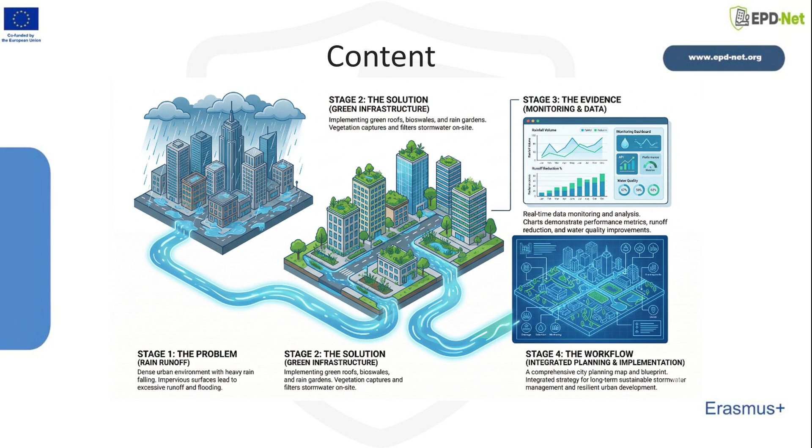This sequence matters because performance percentages have little value if they are disconnected from planning scale, policy context, and maintenance reality. Topic 1903 is therefore not just about what works in theory, but about how to move from evidence to practical, context-sensitive intervention. It also helps learners understand why evidence has to be read in relation to scale, function, and implementation pathway rather than in isolation.

The learning objectives frame the whole deck. First, you should be able to explain the basic concepts of ecological approaches in landscape planning. Second, you should be able to interpret climate adaptation policies and planning frameworks, including the broader European sustainability context. Third, you should be able to analyze ecological risks using digital tools such as GIS, BIM, and parametric design methods. Fourth, you should be able to outline nature-based solutions and multifunctional green infrastructure models. Fifth, you should be able to argue for interdisciplinary and inclusive ecological planning principles.

The associated skills are equally important: integrating ecological networks into planning scenarios, developing adaptive strategies for climate-related risks, applying sustainable water management thinking, and strengthening the resilience of urban form. Topic 1903 therefore expects you to connect evidence, spatial reasoning, and professional judgment in a way that supports real planning and design practice. In assessment terms, you are expected to move from explanation to evaluation and from evaluation to justified planning choice.

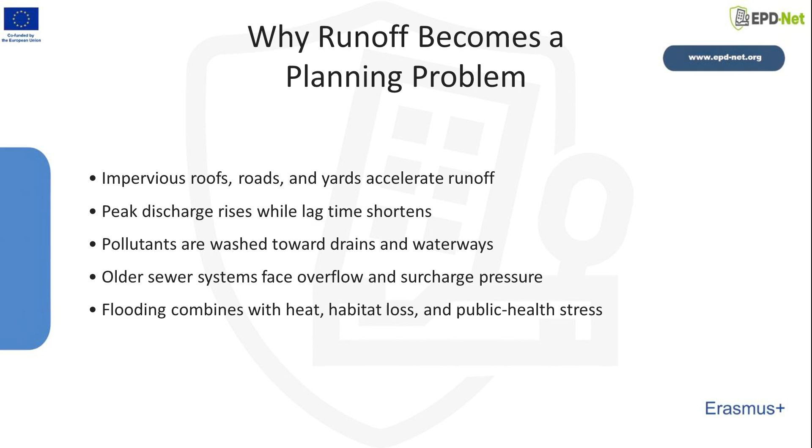The first technical lesson is that urbanization changes how water moves. In undeveloped landscapes, rainfall is divided among infiltration, evapotranspiration, shallow storage, and slow overland flow. When surfaces are sealed with roofs, asphalt, concrete, and compacted ground, that balance shifts quickly. Water reaches drains faster, peak discharge increases, and the time between rainfall and flooding becomes shorter. Pollutants that settle on streets and hard surfaces are also washed downstream more efficiently. In many cities, this creates pressure on aging drainage systems, especially where combined sewers or undersized networks were not designed for current development intensity.

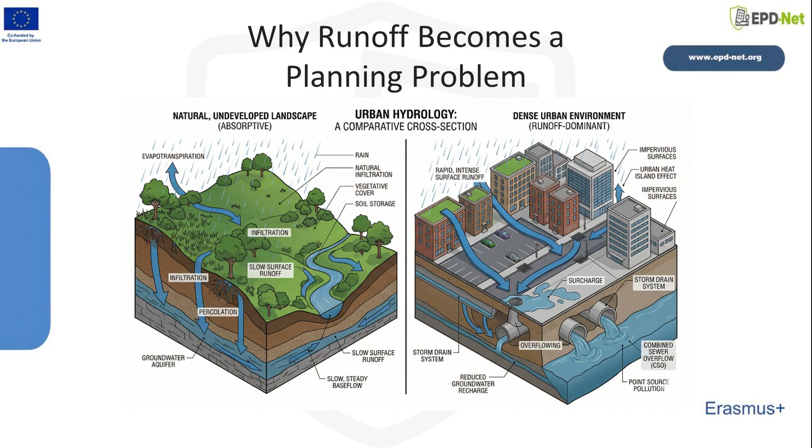The planning implication is important. Runoff should not be treated only as a pipe capacity issue. It is also a land use, design, and ecological function issue. Decisions about surface cover, storage opportunities, street form, open space, and building retrofits all influence resilience.

Stormwater planning today is closely tied to climate adaptation and resilience policy. Instead of treating drainage as a hidden technical service, many frameworks now connect water management to biodiversity, public space, resource efficiency, and disaster risk reduction. Within the European policy context, that shift is visible in the broader sustainability agenda and in support for nature-based solutions as practical tools for adaptation.

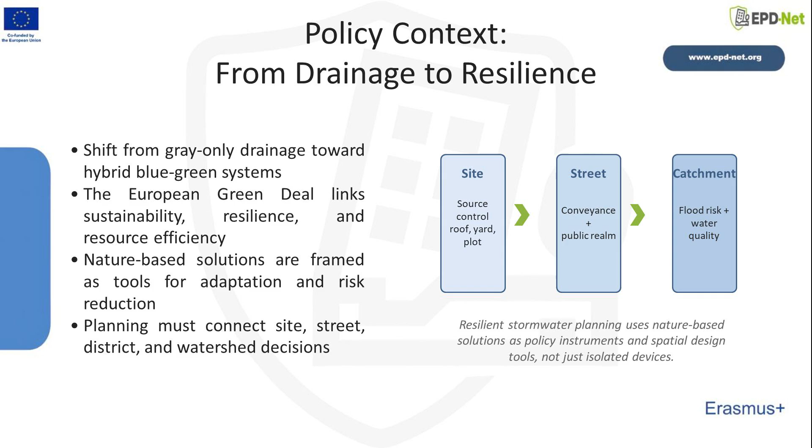For Topic 1903, the policy lesson is that green infrastructure should not be introduced as decoration or branding. It has to be connected to measurable planning goals. That means linking site-scale measures to street, district, and watershed priorities, and showing how they contribute to both environmental quality and risk management. The policy perspective also prevents a common mistake: assuming that one intervention automatically solves every problem. In reality, resilience comes from coordinated systems, not isolated devices.

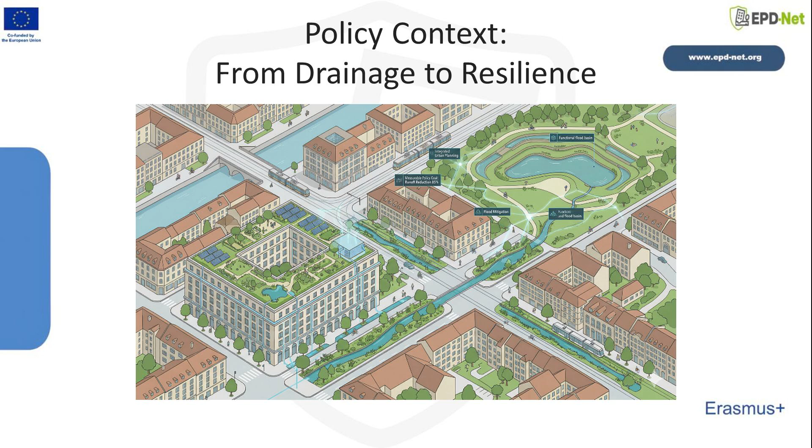That broader framing is useful because it links stormwater decisions to resilience funding, environmental justice, and long-term urban quality. At this point, we need a clear vocabulary. Green infrastructure is not a single technology. It is a family of measures with overlapping but distinct roles.

Green roofs are useful where roof area is abundant and ground space is limited. Bioswales guide and filter runoff along linear routes, especially in streetscapes and parking edges. Rain gardens provide localized detention, filtration, and infiltration in planted basins. Permeable paving reduces sealing and can support distributed storage and infiltration where traffic and soil conditions allow.

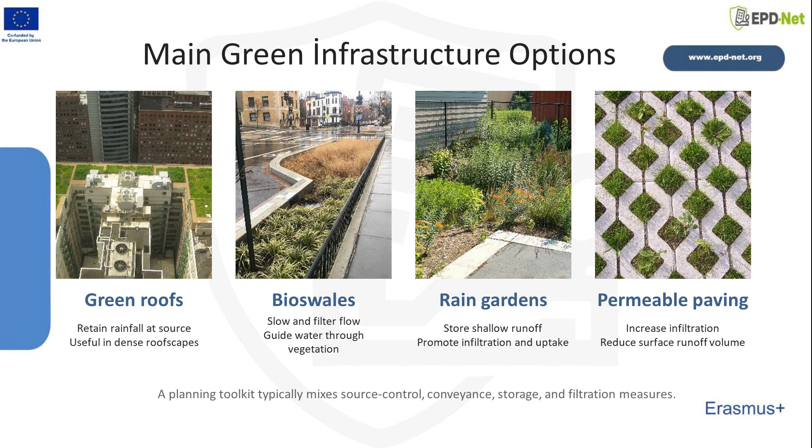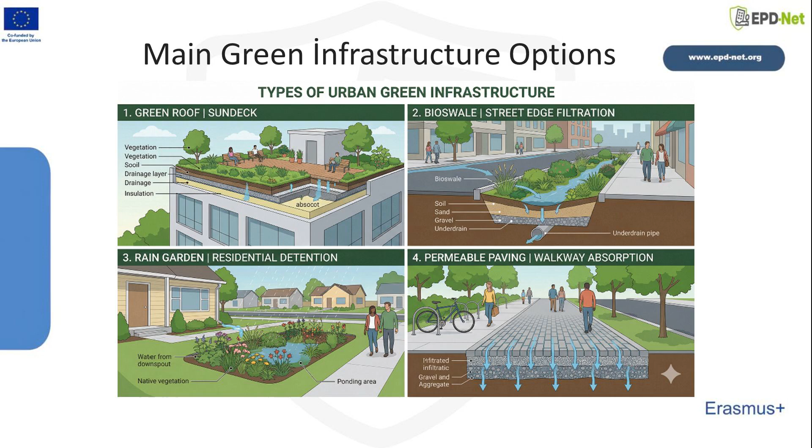The planning challenge is to match each option to urban form, drainage pattern, and maintenance capacity. A dense commercial district may rely more heavily on roof retrofits and hardscape solutions, while a lower-density residential area may have more opportunities for rain gardens and swales. Good practice depends on building a coherent treatment train across scales. The same city may therefore require different measures in different neighborhoods, even when the overall stormwater problem appears similar on paper. It is often more useful to compare interventions by function than by name.

Every green infrastructure option works by changing one or more hydrologic processes: capturing rainfall, storing it temporarily, slowing conveyance, filtering pollutants, allowing infiltration, supporting evapotranspiration, reusing water, or releasing water more safely over time. This process view helps planners understand why performance varies.

A device that is excellent for small and frequent events may lose effectiveness in larger storms once its storage fills. A layout that improves water quality may not produce the lowest local flood depths. A system designed without maintenance access may gradually lose infiltration capacity or become clogged.

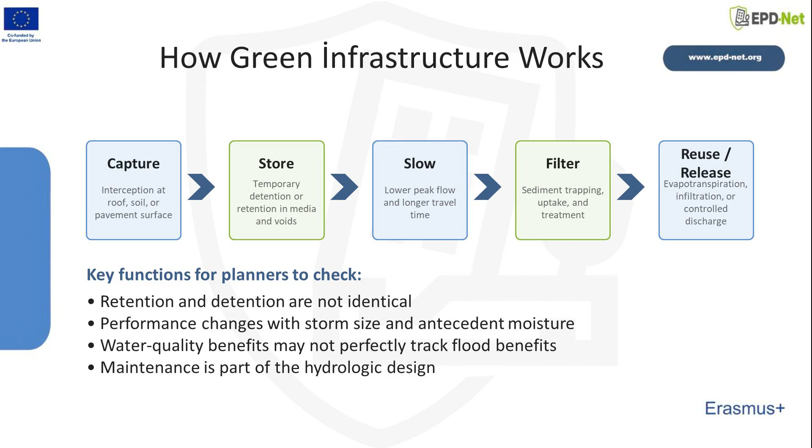Looking at function also supports better combinations of measures. For example, source control at the roof can be paired with street-level detention and neighborhood-scale conveyance improvements. Names alone do not tell you whether a measure suits a specific urban context. Thinking this way also makes it easier to explain trade-offs to decision-makers who may otherwise focus only on one metric or one visible technology.

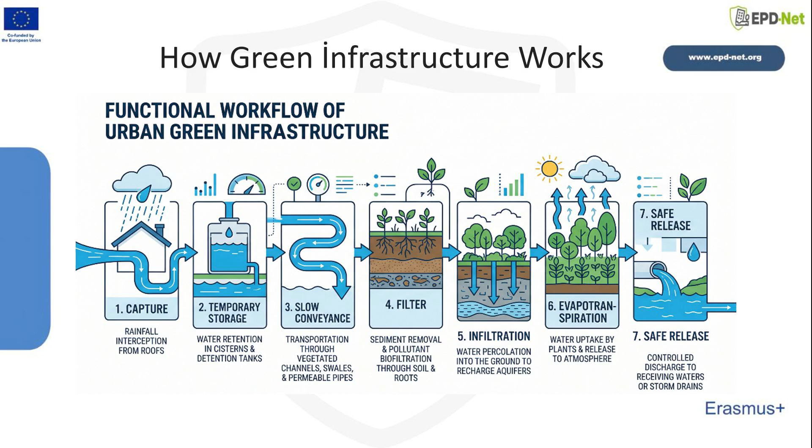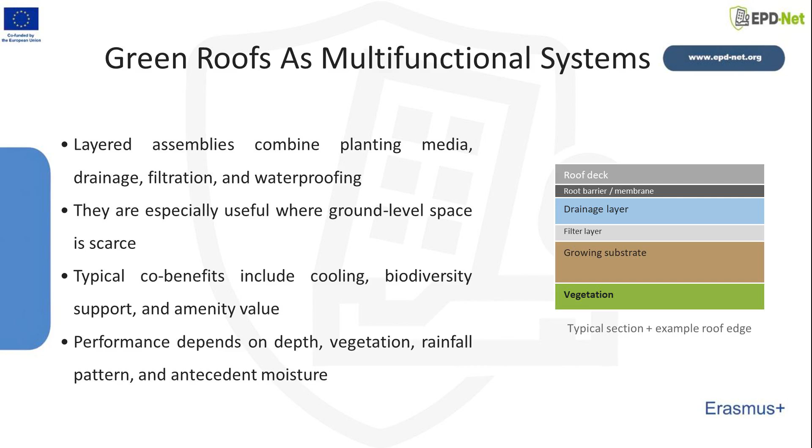Green roofs deserve particular attention because they translate ecological planning into very dense urban form. A green roof is not simply a planted surface placed on top of a building. It is a layered assembly that combines vegetation, growing medium, filter layers, drainage components, and waterproofing to intercept rainfall and delay runoff at the source. In compact neighborhoods, that is valuable because roof area may be the largest available surface for intervention. Green roofs can also contribute to cooling, habitat support, and amenity, which makes them multifunctional rather than purely hydraulic.

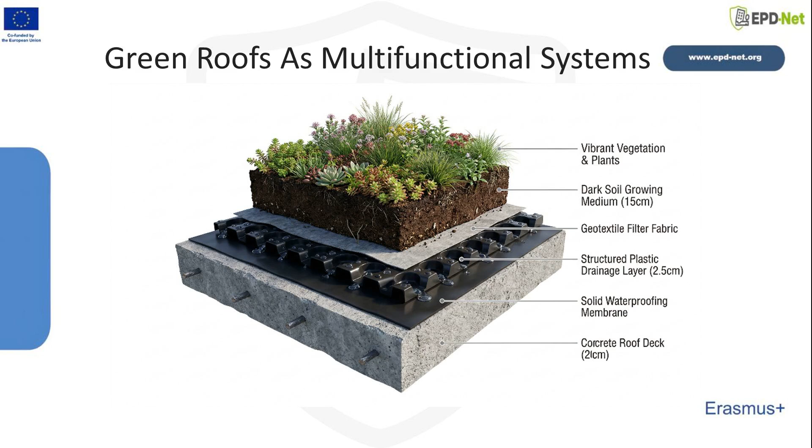But this slide also carries an important caution. Green roofs are not universal substitutes for all other measures. Their performance depends on roof depth, vegetation type, antecedent moisture, storm pattern, and structural capacity. For most planners, they work best as strong source control measures coordinated with complementary systems at ground level.

The evidence on green roofs is promising, but it needs to be interpreted carefully. In the Sheffield testbed, the monitored roof retained just over half of cumulative annual rainfall and reduced peak flow during significant events, showing that green roofs can provide real hydrologic benefits under operational conditions. Review literature supports similar conclusions about runoff reduction, attenuation of peak discharge, and longer runoff response times.

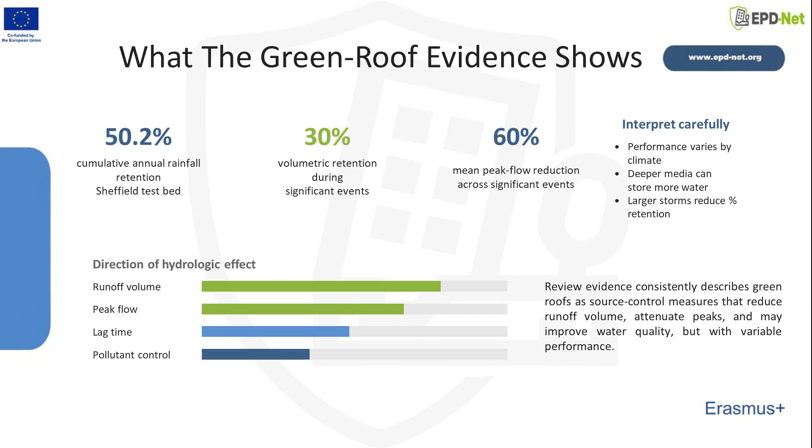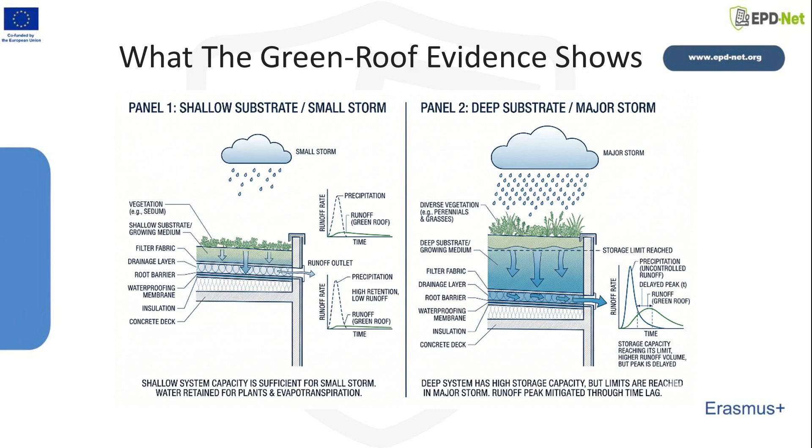However, the same evidence warns against simplistic claims. Performance varies across climates, rainfall patterns, substrate depth, and roof design. Pollutant behavior can also be complex, because some roofs improve quality while others may initially release nutrients depending on media and establishment conditions. The planning lesson is balanced. Green roofs can work, but they should be sized, justified, and communicated with local assumptions in mind.

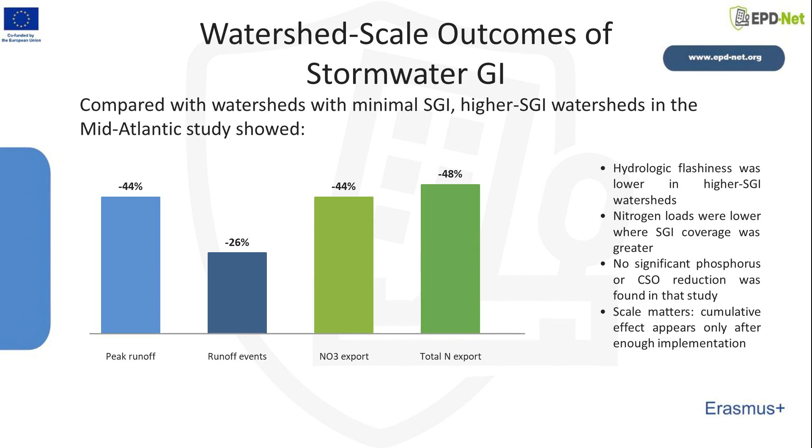At the same time, the results were not uniformly positive across every indicator. In that analysis, reductions in phosphorus and combined sewer overflows were not statistically significant. This is a useful teaching point. Watershed benefit is real, but it depends on the outcome being measured, the level of implementation, and the existing infrastructure context. It also suggests that the scale of implementation matters.

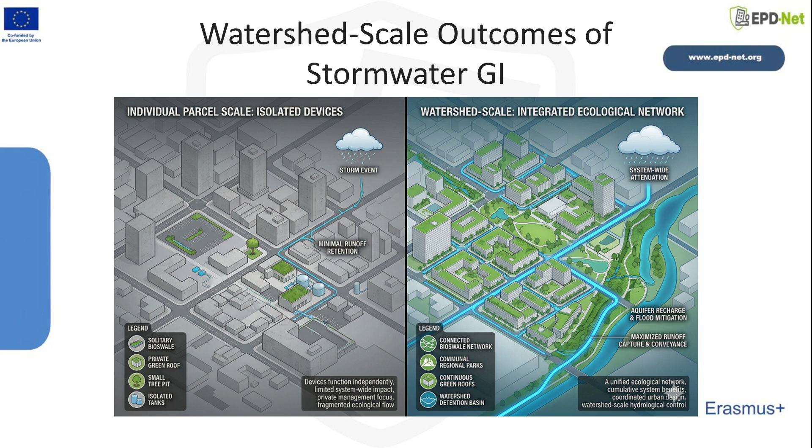Scattered devices may help locally, but broader spatial coverage is usually needed for system effects. Before detailed design, planners need an efficient way to compare options. The New York screening case is valuable because it demonstrates a practical first step: rapid assessment of which measures deserve more detailed investigation in a specific watershed.

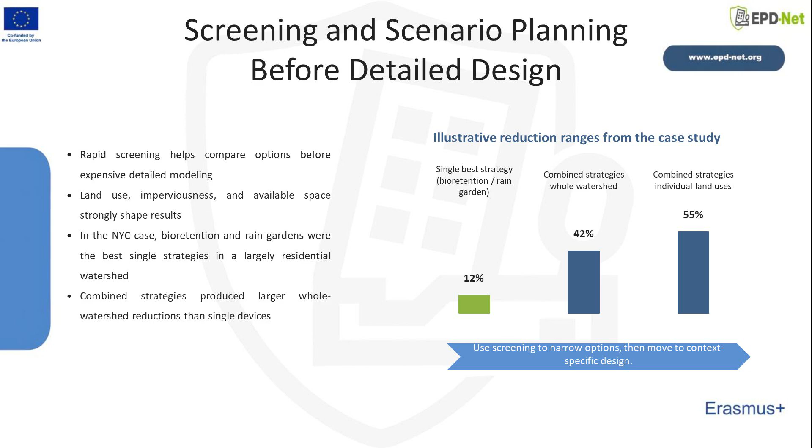In that low-density residential context, bioretention and rain gardens emerged as the strongest individual strategies for runoff reduction, while combinations of interventions produced larger overall reductions than single devices alone. The main lesson is methodological. Not every project should start with high-cost simulation.

Early screening can identify the most plausible strategies based on land use, imperviousness, available space, and drainage structure. That saves time and focuses technical effort where it matters. It also supports better planning conversations, because stakeholders can compare relative suitability before becoming attached to a particular solution.

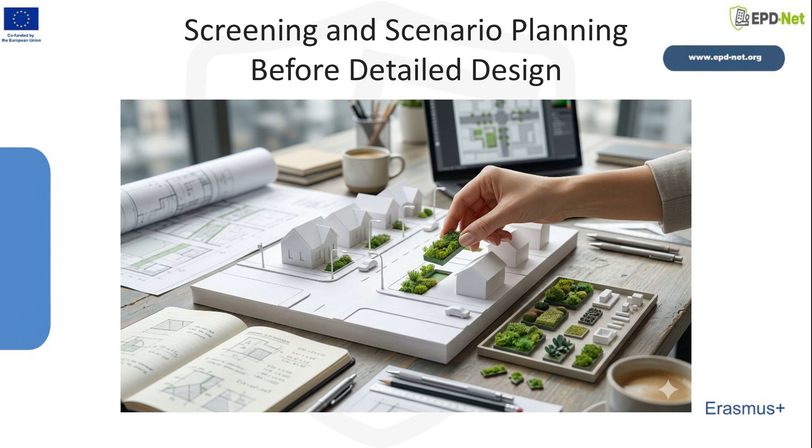Screen first, then move into detailed hydrologic, design, or cost analysis. In professional practice, that makes screening a bridge between broad policy ambition and site-specific intervention design. Neighborhood scale modeling adds another layer of insight because it reveals trade-offs among objectives.

In the Chicago application, the model was intentionally parsimonious. It was designed to support fast scenario exploration rather than to function as a perfect predictive engine. That makes it very relevant to planners, who often need to test multiple options quickly in early project stages.

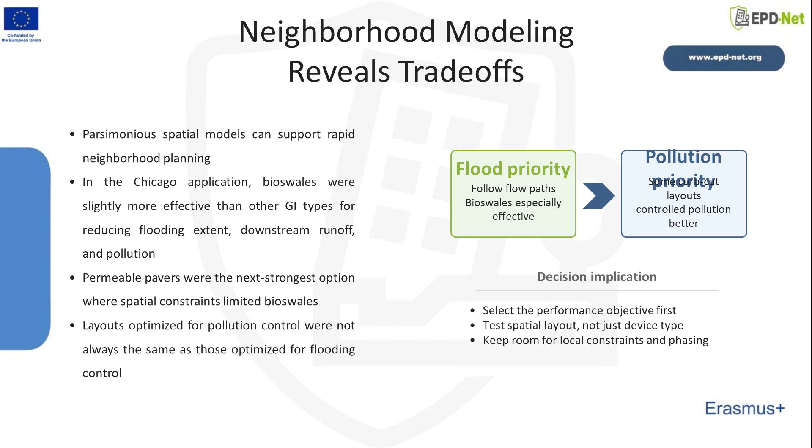In that case, bioswales performed slightly better overall than the other tested interventions for reducing flooding extent, downstream runoff, and pollution. Permeable pavers were also attractive where space limited the use of larger vegetated measures. Most importantly, layouts optimized for one objective did not always optimize another. A configuration that performed well for pollution reduction was not necessarily the one that minimized flooding most effectively.

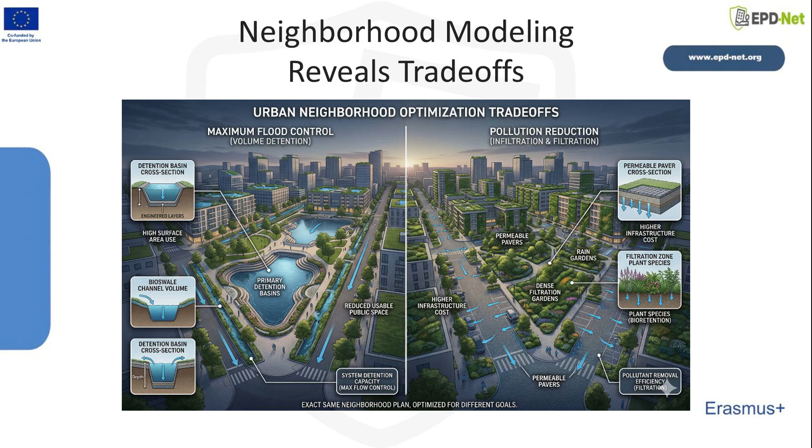Performance goals must be declared before alternatives are ranked. This is why scenario planning is so valuable. It makes competing priorities visible before capital is committed. The learning outcomes explicitly mention GIS, and that makes sense because GIS is the most natural entry point for green infrastructure planning. It helps planners identify where runoff risk, impervious cover, drainage pathways, available space, and local constraints intersect.

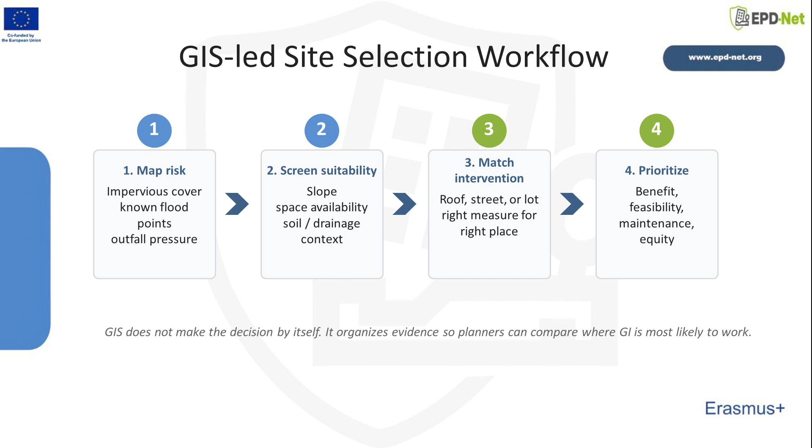In practice, a GIS-led workflow might begin with mapping flood complaints, topography, land cover, drainage inlets, and ownership patterns. It can then be used to prioritize roofs with suitable area, streets with retrofit potential, or open spaces that could host detention and infiltration measures.

Importantly, GIS should be presented honestly. Its strength in Topic 1903 is screening and prioritization, not false precision. It helps narrow down where interventions are plausible and where they are likely to be ineffective or infeasible. That makes GIS a bridge between ecological risk analysis and implementable design decisions.

BIM and parametric design enter the workflow after screening has identified plausible sites and strategies. Their value lies in coordination and iteration. For example, a green roof retrofit can be tested against roof area, slope, drainage points, storage depth, access paths, loading constraints, and conflicts with existing equipment.

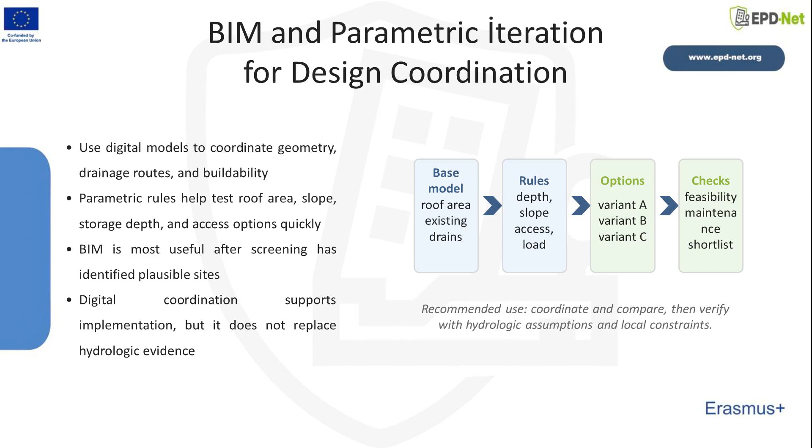Parametric rules can quickly generate alternative sections or layouts to see how changes in geometry affect storage and constructability. BIM can coordinate multiple disciplines so that waterproofing, planting systems, overflow routes, and maintenance access are not treated as afterthoughts. But Topic 1903 also requires a careful warning. These digital tools do not automatically validate hydrologic performance.

They help structure design decisions; they do not replace local rainfall data, evidence from comparable systems, or a credible maintenance strategy. Used properly, they make design coordination stronger and more transparent. They are especially useful when retrofit projects involve several stakeholders and many technical constraints that must be reconciled quickly.

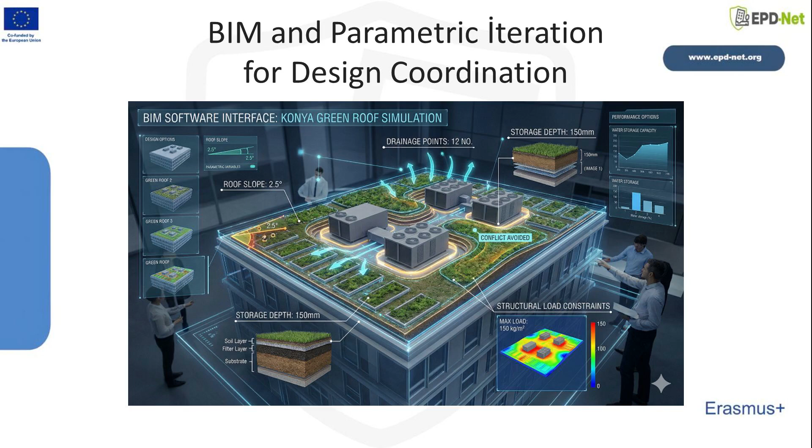A major strength of green infrastructure is that it supports circular and multifunctional thinking. Traditional drainage often treats stormwater as a nuisance to be removed as quickly as possible. Ecological planning asks a different question. Can rainfall be slowed, stored, reused, infiltrated, or reintroduced into local ecological cycles in ways that create additional value?

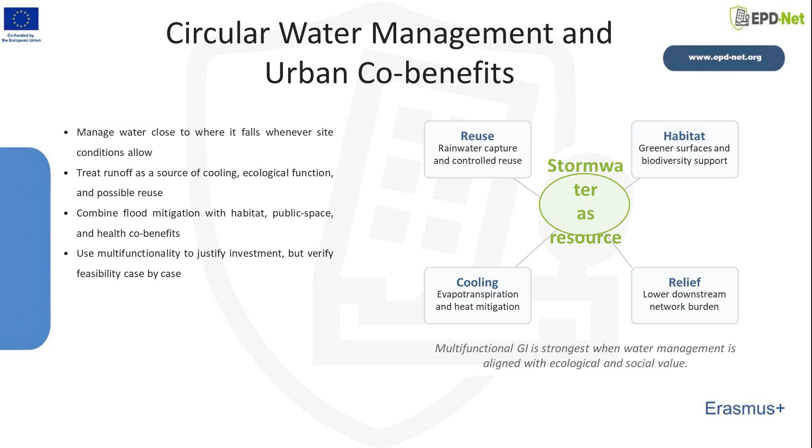When stormwater is approached as a resource, the planning conversation expands beyond flood control. The same intervention can contribute to cooling, habitat, amenity, shade, public space quality, and even water reuse in some contexts. This multifunctionality is one reason green infrastructure belongs in broader ecological planning rather than being confined to engineering alone.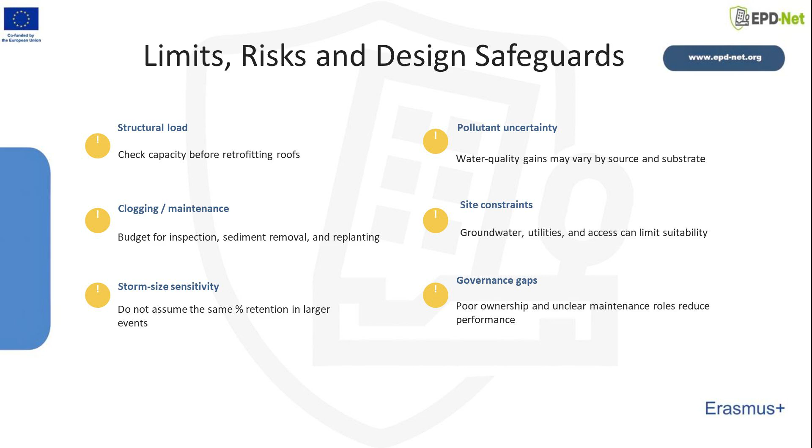Roof retrofits may be limited by structural capacity and access. Permeable systems can clog if sediments are not managed. Performance percentages often drop during large storms or under saturated antecedent conditions. Pollutant removal can vary by substrate, source area, and maintenance history. Ground-level systems may conflict with utilities, contaminated soils, or right-of-way constraints. Governance can be just as important as design, because unclear ownership or maintenance responsibility can weaken performance over time.

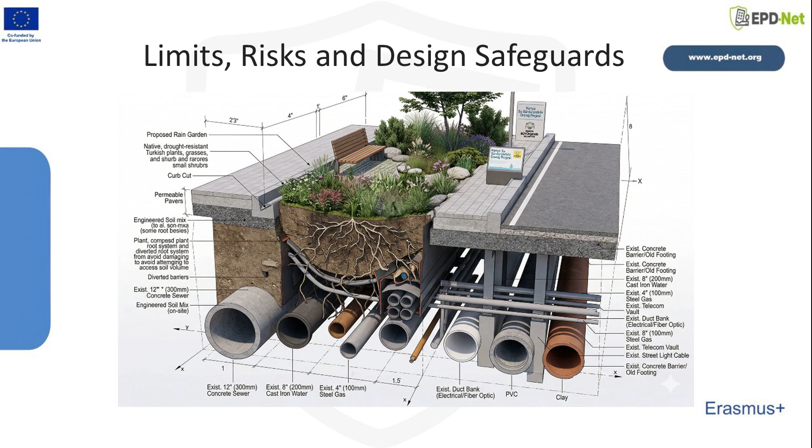This caution does not undermine green infrastructure. It makes the case stronger by preventing overselling. Topic 1903 teaches that the right message is conditional rather than absolute. Green infrastructure is powerful when matched to context, sized honestly, coordinated across scales, and supported by inspection and maintenance. Technical performance alone does not determine success.

The final learning outcome emphasizes interdisciplinary and inclusive implementation, and that is especially relevant for visible public realm interventions such as rain gardens, bioswales, and neighborhood retrofit programs. Planners, engineers, owners, maintenance teams, and local communities all affect whether a measure is accepted, cared for, and sustained. Inclusion matters because risk and co-benefits are unevenly distributed across cities. If interventions are placed only where implementation is easiest, they may miss neighborhoods with the greatest vulnerability.

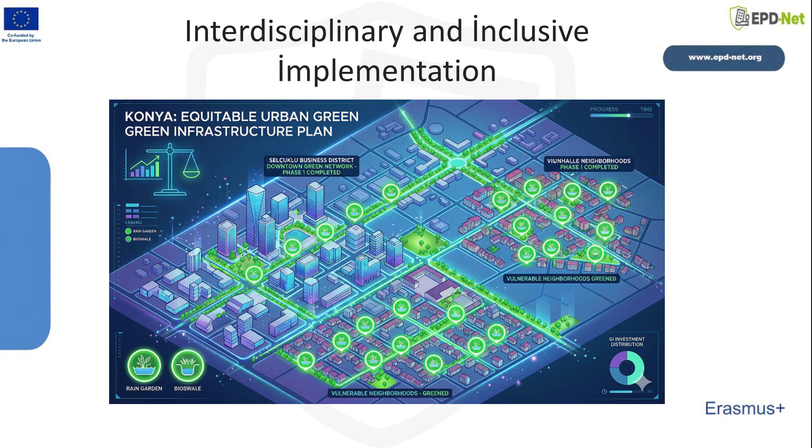Interdisciplinary practice matters because ecological, hydrologic, construction, and governance decisions are tightly linked. A strong Topic 1903 response therefore combines spatial evidence with collaboration and stewardship. Green infrastructure becomes more resilient when technical design, institutional responsibility, and local acceptance are aligned from the beginning. In that sense, implementation quality is partly a governance question, not only a design question.

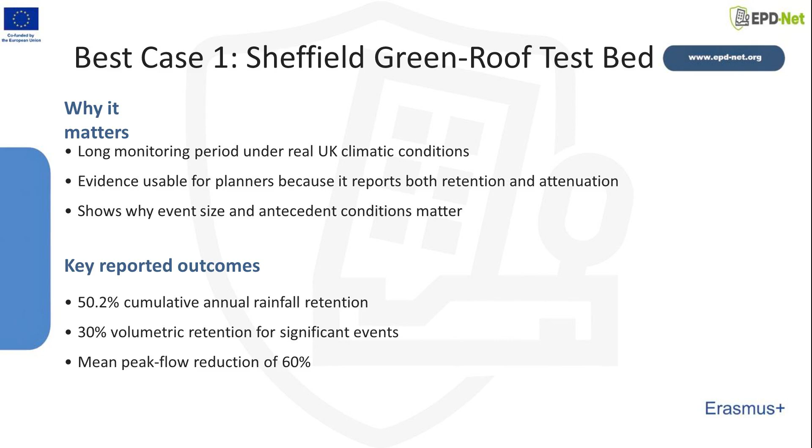The Sheffield Green Roof Study is an especially useful best case because it is empirical, monitored over time, and directly relevant to source control planning. It shows that green roofs can retain a meaningful share of annual rainfall while also reducing peak discharge and altering runoff timing during significant events. Just as important, the study demonstrates why monitoring matters. Natural rainfall is irregular, and real roofs do not behave like simple textbook storage tanks. Performance depends on the pattern and sequence of storms as well as on the condition of the system.

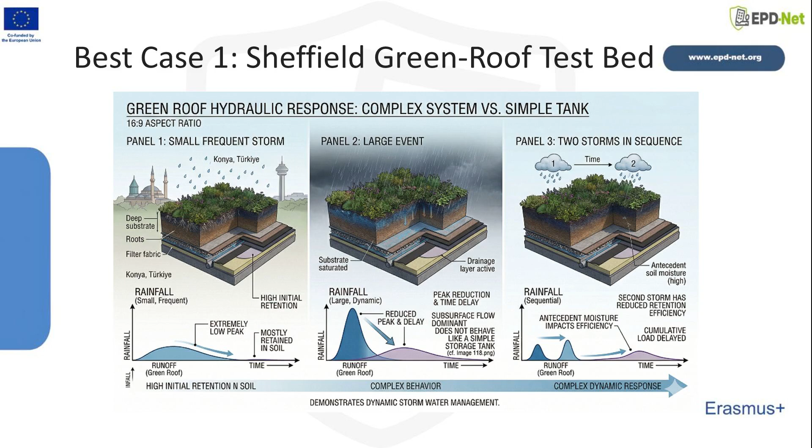For planners, the transferable lesson is not that every green roof will reproduce the same percentages. The stronger lesson is that source control benefits are real when the system is well designed and when claims are interpreted in relation to climate, storm depth, and antecedent conditions. It is therefore a strong case for teaching realistic expectation setting alongside technical optimism.

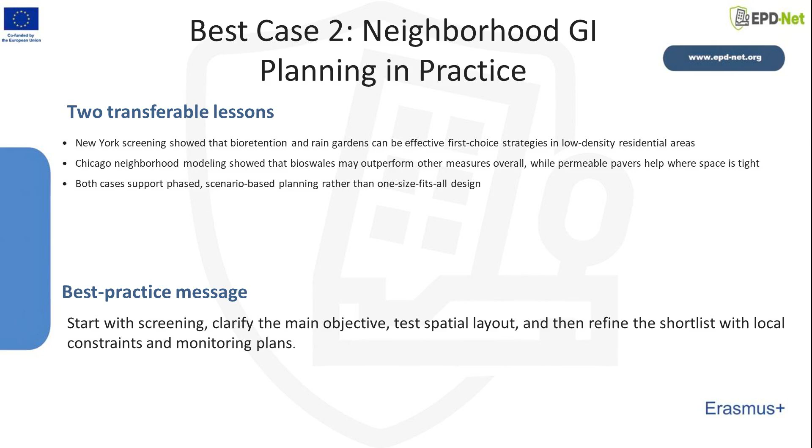The second best case lesson comes from combining the screening and neighborhood modeling studies into a practical workflow. Together, they show how planners can move from a broad comparison of options to more tailored scenario testing. The first step is to use local land use and drainage conditions to identify which interventions are most plausible. The second step is to define the primary objective clearly. Are you trying to reduce flooding extent, reduce downstream runoff, improve water quality, or balance several goals? The third step is to test layouts and combinations rather than assuming that one device will dominate everywhere.

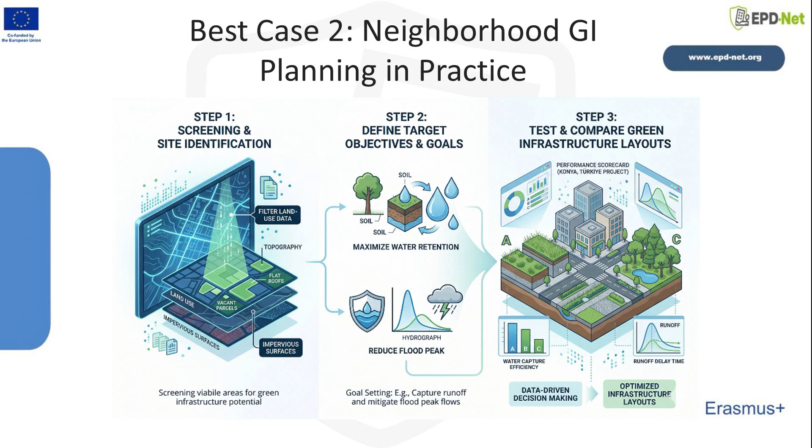This is a powerful professional model because it avoids both extremes, jumping too quickly into detailed design, or staying forever at the level of abstract policy language. Evidence-based screening, clear objectives, and scenario comparison allow green infrastructure to be used as a planning system rather than as a collection of pilot projects.

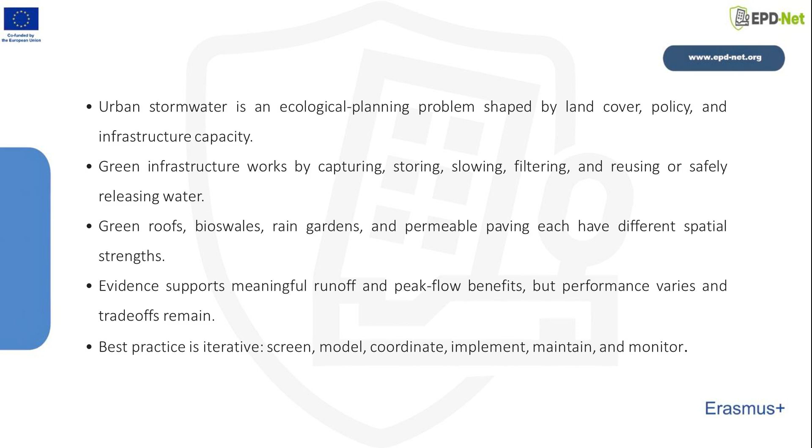To conclude, urban stormwater should be understood as an ecological planning problem shaped by land cover, policy, infrastructure capacity, and social choice. Green infrastructure works because it captures, stores, slows, filters, reuses, or safely releases water. Measures such as green roofs, bioswales, rain gardens, and permeable paving each have advantages, but none should be treated as universally superior. The Topic 1903 evidence base supports meaningful hydrologic benefits, especially for source control and for cumulative watershed improvement, while also highlighting trade-offs, constraints, and maintenance needs.

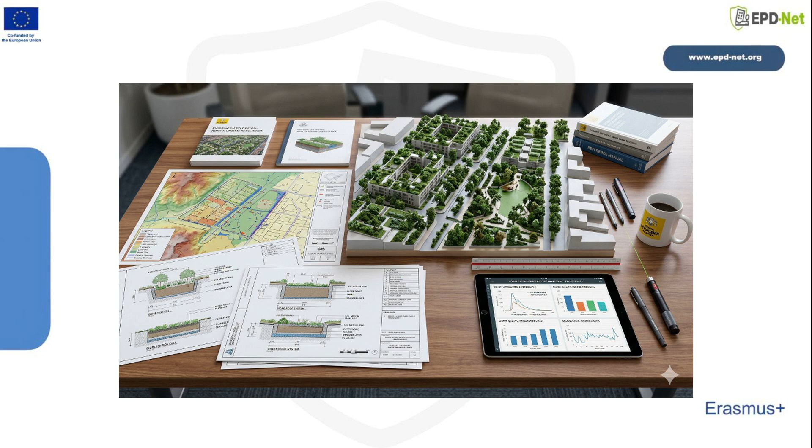That is why the best professional mindset is iterative rather than promotional. Start with screening, clarify your performance objective, test combinations, coordinate design carefully, and build in maintenance and monitoring from the outset. When these conditions are met, green infrastructure becomes a credible and multifunctional strategy for climate adaptation and urban resilience. That is the core ecological planning message of Topic 1903. Multifunctional systems perform best when they are place-based, evidence-led, and maintainable.